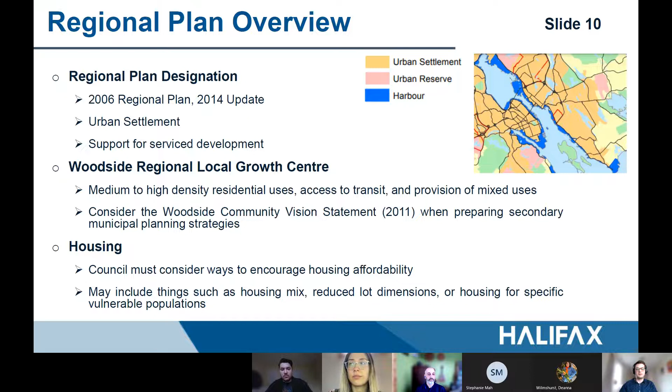That Woodside Vision and Action Plan that I spoke to, I just wanted to quickly read the vision: Our community shines as a destination with a rich history tied to the diverse people who live, work, and care about Woodside. This study identified some key assets, and just a few of them that I'd like to point out are the ferry terminal and the local transit service, local schools, the community college, the hospital, and the industrial park nearby.

This future growth node planning process is an opportunity to implement actions from that vision and leverage assets through comprehensive planning processes.

Under the regional center plan, the area is designated as future growth node, and the zone is Comprehensive Development District 1. The existing uses on the site are woodland, wetland, and office building, and I'll speak to these in detail in a moment.

Future growth nodes under the Regional Center Secondary Municipal Planning Strategy are large sites which can accommodate additional growth, but which require master planning to create policy for parks, trails, public streets, infrastructure, land uses, bonus zoning provisions, and more before development can take place.

Development will then proceed under development agreements, which gives specific location of parks, roads, trails, buildings, etc., and can allow development under specific zones and land use bylaw provisions.

Currently, the planning process is in stage 1, or part 1. This is the master planning process that I mentioned on the last slide. The purpose of this process is to take public feedback, which is what we're doing right now. During this process, we also do a detailed review of environmental features, site context, a traffic statement, infrastructure review, and culture and heritage assessments.

The outcome of a master planning process would be policies contained within the regional center secondary planning strategy and a concept plan, which would show things such as an overall site plan, location of important connections such as public roads and trails, the location and general scale of development—for example, low rise or mid rise—and general land uses such as commercial or residential, and can also include policies on things like buffering, landscaping, stormwater, and the environment.

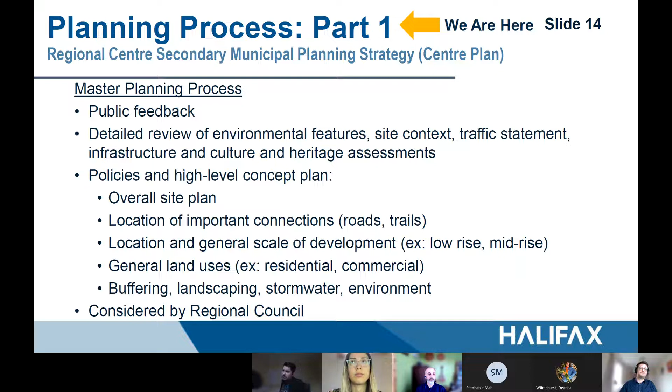This master planning process and the policies that come from it will be considered by regional council. Should regional council approve policies for the site, the planning process would advance to part 2. This is the development agreement process.

A development agreement enables construction of a project under a local planning policy. It is a binding legal contract between HRM and the landowner. This stage would also include additional opportunities for public feedback.

The development agreement would include specific details on things like parks, building design, land uses, the number of units permitted in the development, lighting, materials, bonus zoning, phasing, roads, and more. A development agreement would be considered by the Harbour East Marine Drive Community Council.

And the final stage of the planning process would be the permitting and subdivision process. If planning policy is approved by regional council and a development agreement is approved by the community council, the project can proceed to subdivision for streets and lots.

Just a couple notes on that: the wetland cannot be altered unless provincial approval is granted, and street and infrastructure design must comply with municipal standards. Subdivision would involve HRM internal review and would also involve the province and other external agencies. Each building is, of course, also required to get a building permit, and this would check for compliance with the land use bylaw, any potential development agreements, building codes, and more.

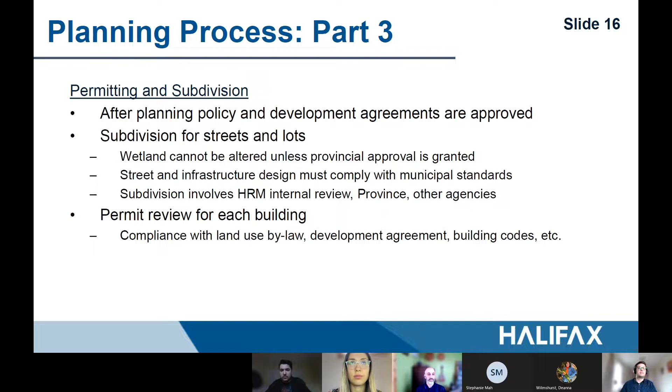A few specific details we wanted to cover on wetland and environment. Wetland alteration, as I previously mentioned, is jurisdiction of the province of Nova Scotia. Any proposed alteration would require provincial review and approval before it could proceed.

On the municipality side, HRM requires a minimum 20-meter buffer from wetlands and watercourses that must remain undisturbed. Paths, driveways, roads, and infrastructure are permitted within this buffer. Stormwater management practices may include innovative ways of capturing runoff, which can be discussed through this process. And the wetland may be transferred to the municipality as part of the outcome of the development process.

HRM has several policies that speak to the environment, just a few I wanted to highlight here. From the Future Growth Node policies, that requires a land suitability assessment, as I previously mentioned. The HalifACT 2050 plan discusses protecting sensitive green spaces, creating climate-informed stormwater management plans for development, and reducing urban sprawl.

The Green Network Plan recognizes the importance of wetlands and their associated buffers. And the Urban Forest Master Plan discusses municipal street trees on public streets, retaining existing tree cover through screening and buffering provisions, and allowing for new trees to be planted for new development. The subdivision bylaw also requires a parkland dedication, which would set aside a certain amount of parkland on the site.

In terms of the planning process, it's already been initiated by Regional Council. HRM internal review of the project is currently ongoing, and we're currently at the public meeting phase of the policy part of the project. In the future, the project will advance to the draft policy and development agreement stage, and there will be more public input welcomed at that time.

Any policy recommendations would go to Regional Council and include a public hearing where the public is welcome to address Council directly. If Regional Council should approve the policy and the plan amendment, it would be able to proceed to a development agreement, which would be considered by the Harbour East Marine Drive Community Council. If they choose to approve a development agreement, there's a 14-day appeal period where any aggrieved person can appeal the development agreement.

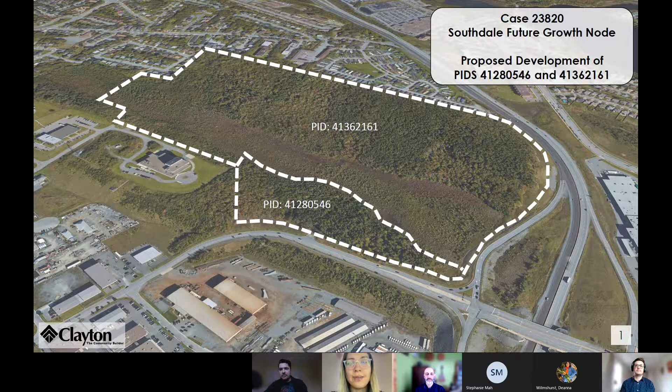Zooming out to look at the broader context, we can see that the subject site is very conveniently situated amongst services that will meet everyday needs of the residents living here.

The site abuts an existing transit route, shown in the aqua blue color. The Woodside Ferry Terminal is easily accessible to travel to and from downtown Halifax and beyond. The site is within walking distance of a commercial node that includes a grocery store just 600 meters away.

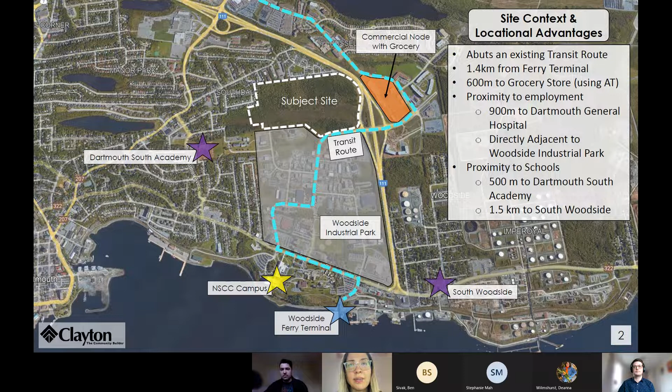There's close proximity to employment nodes, including Dartmouth General Hospital and the Woodside Industrial Park. There are 2 schools nearby, Dartmouth South Academy being only 500 meters away and South Woodside School being 1.5 kilometers away. There's also the NSCC Ivany campus about 1.2 kilometers away. Next slide, please.

This is a detailed view of our site plan. It contains a variety of home styles designed for different lifestyles and budgets, laid out with an interconnected street network. You can see the breakdown of the unit styles on the right-hand side of the screen. The plan includes multiple residential units, townhouses, and a smaller number of fourplexes and single-family homes. I'll go over the choice of unit styles a bit later in the presentation.

There is approximately a 2-acre park located as a focal point in the center of the community, including a buffer of existing trees against the neighboring properties. We have left the wetland largely undisturbed. The site is accessed with one single road crossing the wetland.

The interconnected street network provides access to the surrounding community via Lynn Drive, and a series of trails shown in bright red on the plan provide opportunities for active transportation and leisure throughout the area. I'll pass it over to Connor to go over the next slide.

Perfect. Thank you, Stephanie. As mentioned prior, my name is Connor Wallace. I am a planning consultant with Zzap Consulting, working with Clayton Developments and the landowner on this particular project. I'd like to briefly speak to the proposed development concept for the lands as it relates to the applicable planning policies contained within the regional center secondary municipal planning strategy.

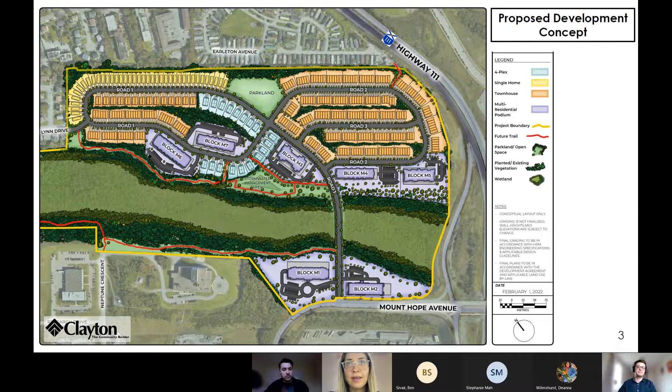Clayton Developments has a history of developing in environmentally sensitive ways. This slide shows the different stormwater management best practices that we've used in the past and had great success with. Rain gardens, bioretention areas, permeable pavers — all of these features work to absorb, direct, and/or treat stormwater to meet HRM standards and requirements, making sure that the quantity is balanced to pre-development conditions and the quality of the stormwater runoff is maintained and does not negatively impact the surrounding natural environment.

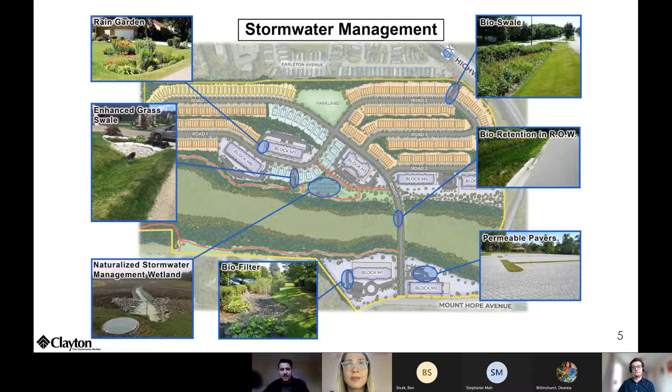So as alluded to earlier, there were several technical studies and analysis completed in conjunction with the development concept presented this evening. The first was a land suitability analysis, a desktop evaluation to assess potential environmental constraints with field verification for wetlands, watercourses, and species at risk. The analysis identified limited environmental constraints within the site, including no specific species at risk.

The large wetland on the site was not identified as a wetland of special significance by Nova Scotia Environment and Climate Change.

Another technical study completed was an archaeological analysis, including a historical background study and reconnaissance for archaeological resources within the site. South of the wetland, a probable house foundation and outbuilding was discovered. Further shovel testing determined that these findings are not cultural in nature, so no further archaeological mitigation was recommended in the report.

An additional study was a traffic analysis, where a traffic engineer looked at intersection sight distance analysis for safety of turn movements and trip generation analysis, which during peak hours in the morning and evening ranged from 200 to 250 vehicle trips. The study recommended a crosswalk at Mount Hope Avenue connecting to the existing multi-use path on the western side of Mount Hope Avenue, and identified that site-generated trips are not expected to have any significant impact on levels of performance on adjacent streets, intersections, or the regional street system.

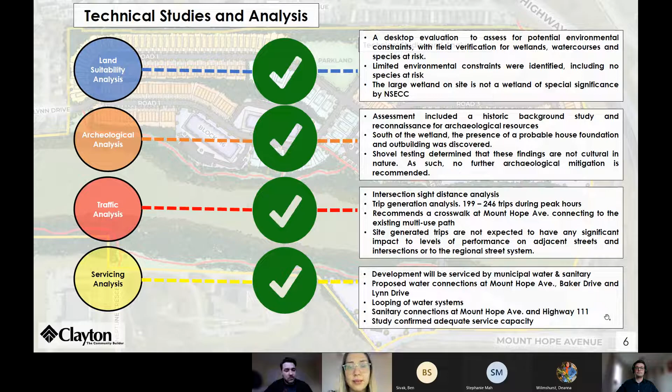A major priority for this project is to provide housing that is attainable, meaning affordable for the average household. Some practical ways we're working towards reducing the cost of housing are creating narrower frontages and smaller lot sizes. Building less road infrastructure per residence allows the cost of the units to come down, and building homes with a smaller footprint lowers construction costs. The multiple residential buildings are all kept to a mid-rise height rather than taller forms, which allows us to reduce construction costs. These savings can all be passed along to renters and buyers, resulting in more attainable rents and home prices. Next slide.